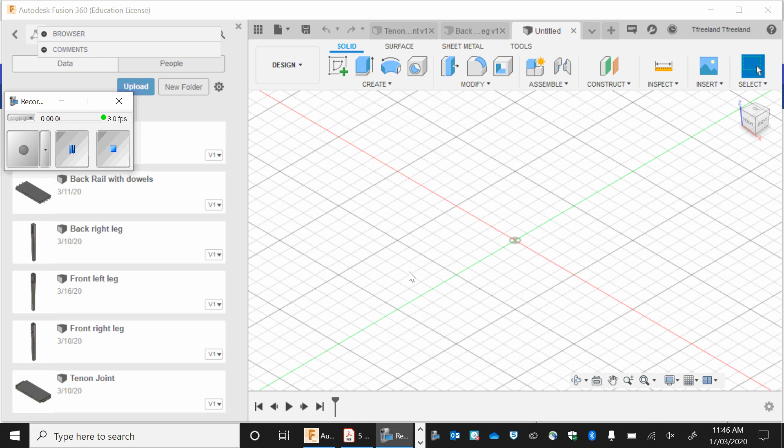The first thing we need to do, we've created a new design, but you need to save this design to be able to put any components in there. So I'm going to save this design in my folder under industrial technology, bedside table, and just save this as completed bedside table.

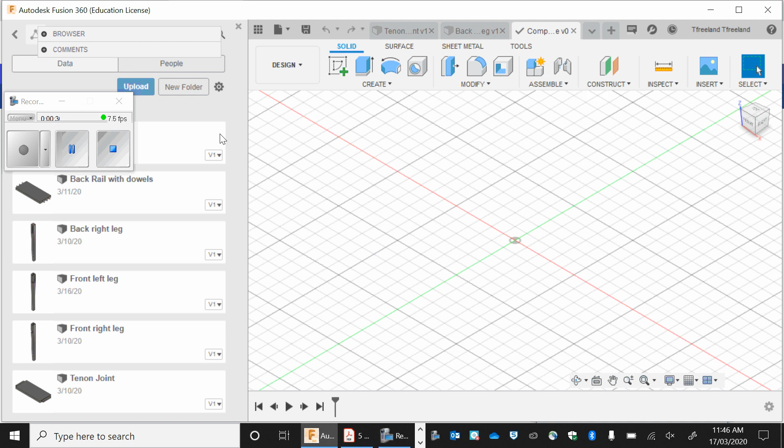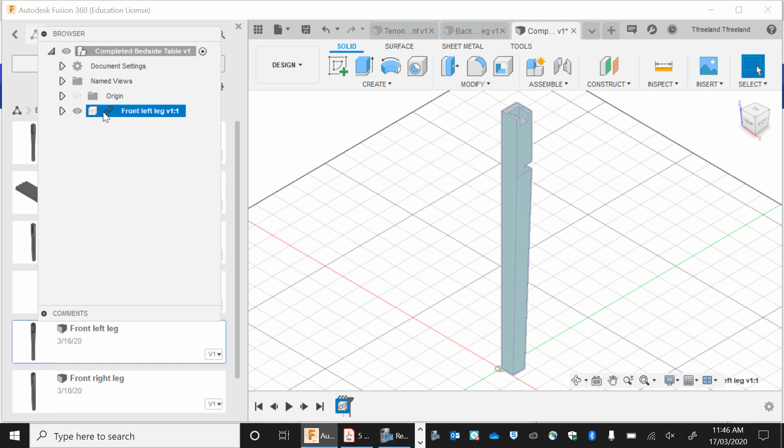I've saved it. What I'm going to do next is go first with my front left leg and see how I can insert it into my design. I'm going to insert that in, and there's my job. I'm just going to rotate it around 90 degrees and press enter. Next, that's my leg there, and I'm going to ground that, so basically with the little pin, that's going to ground my job so it won't move.

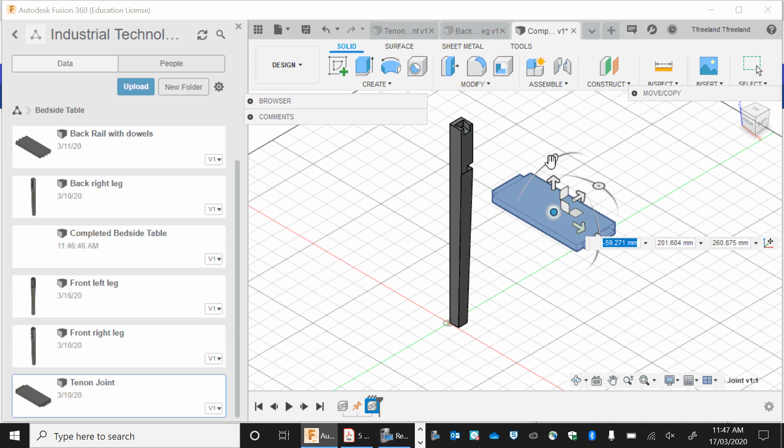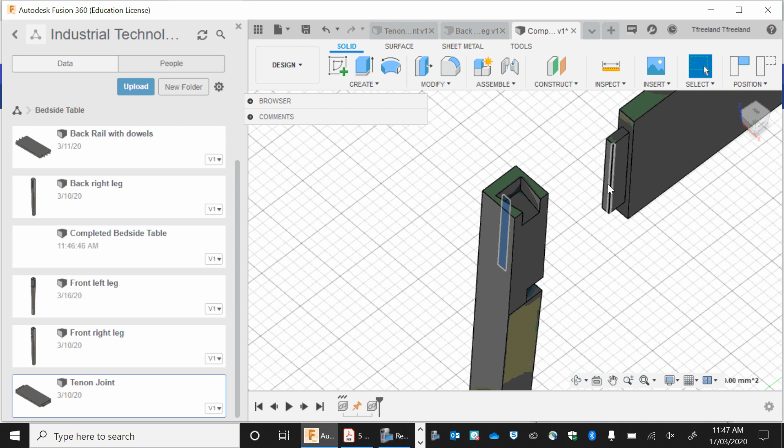What I do next is bring in my tenon joint, insert into design, rotate it, enter. Now I'm going to need to use my orbit tool so I can get around, get into the tenon, and rotate in. I'm going to select the back of that joint, and then select the top of my tenon, holding shift so I can hold them both at the same time. So that's blue and that's blue. Now we're going to be using the joint tool, press joint, we capture, so continue. This is a type of joint, we just have it on rigid because we know it's just going to sit in there stationary, and we go enter, and our job has sat in there like so.

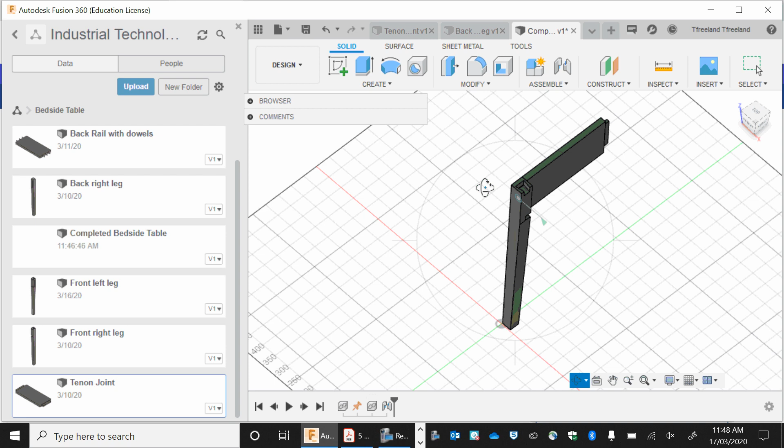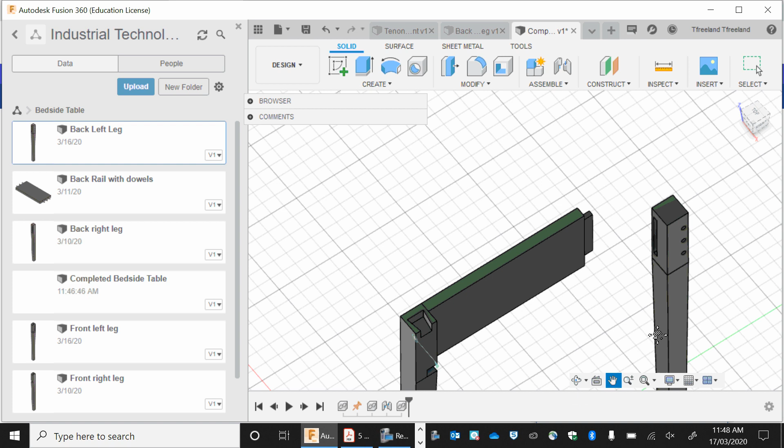What we do next is we've got our front left leg there. Now we get our back left leg, insert into drawing, and repeat the same step. Enter it into drawing, we go enter. I'm going to rotate it around until I can see the tenon or the mortise, so I can see the back of my mortise. I want to select that area, orbit, and hold shift, so I've got both blue. We join - well, that's on revolute as well, so rigid, and there we go.

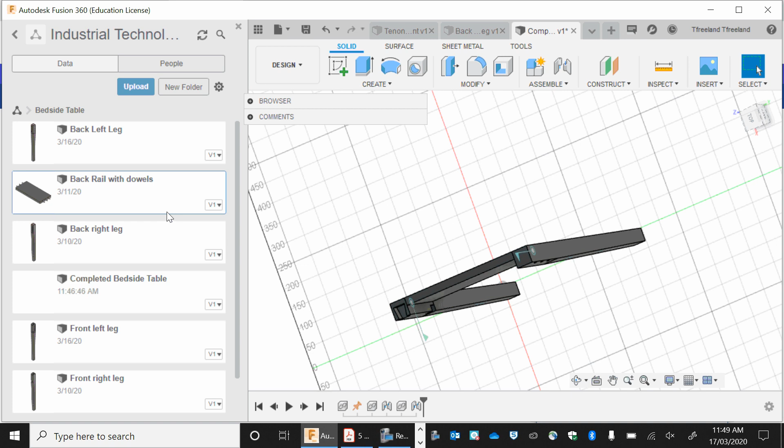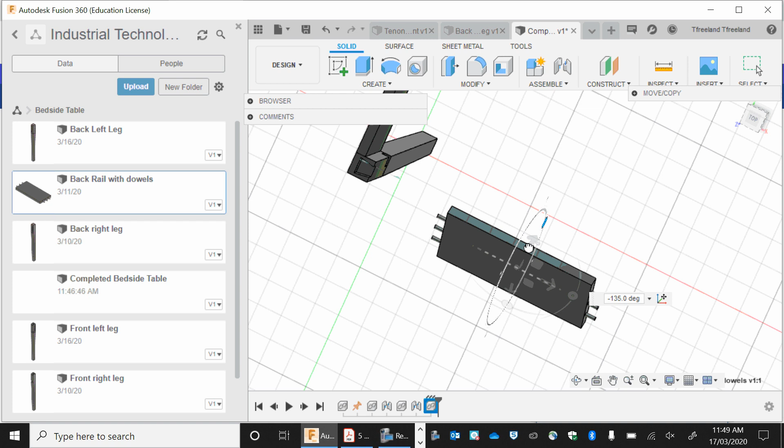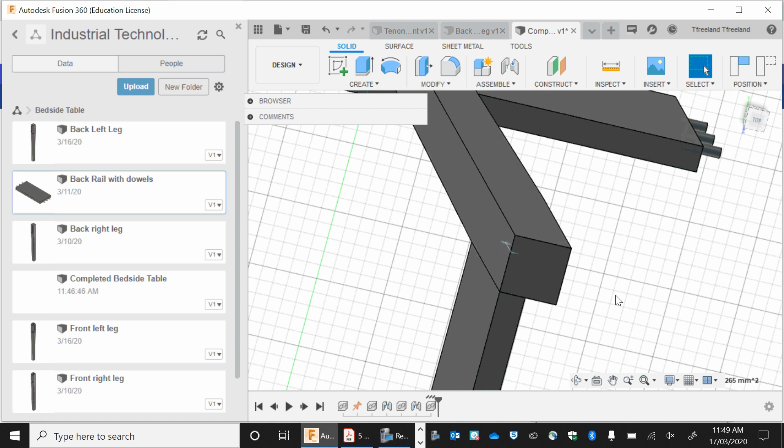What we do next is I'm going to insert my back rail with dowels. I'm going to line it up, rotate it. Can't really see it too properly, so I'll get my orbit tool, and move it over to my joint to make it a little bit easier. What I need to do here is select one of the dowel tips, so I'll hold shift and select that. Because I've selected the top one, I need to go to the top hole on here. Can be a little bit tricky.

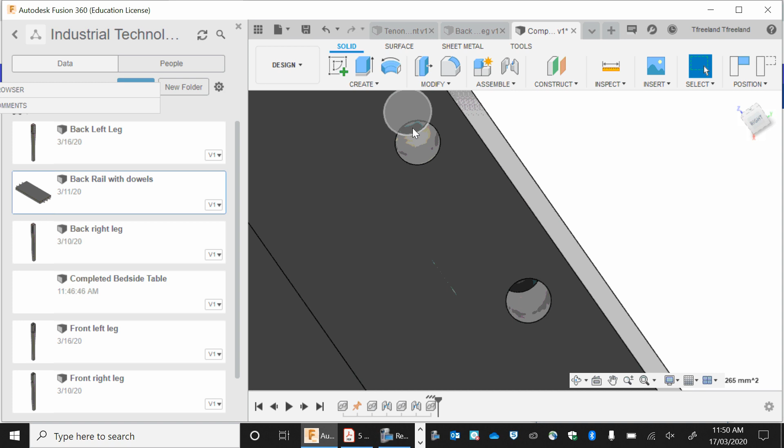Now I can see the back, so the back's there. Hold shift, and then I'm going to go join, we'll capture that. Still on revolute for some reason - rigid. And there we go. So that feature right there, how I'm changing from revolute to rigid, basically that's just how it animates the joint, so it's really nothing to worry about.

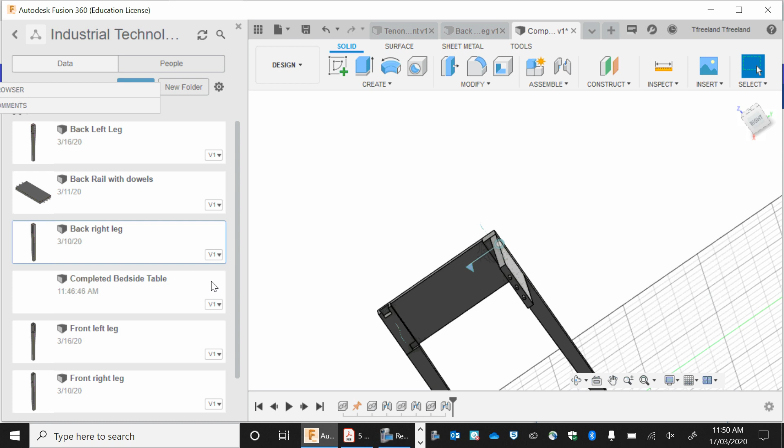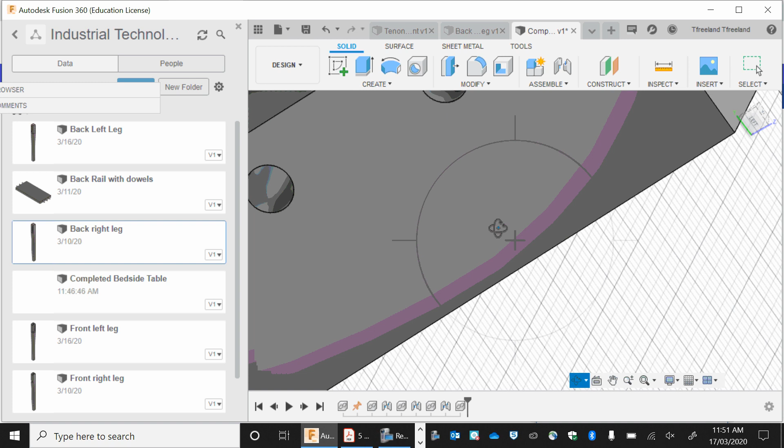I've done both of my left legs. Now I want to do my back right leg, so I'm going to insert that into my drawing. So we've got it there, I'll enter. Remember, I need to select my dowel hole - always try and select the back to make it a little bit easier on yourself, so it can be quite hard to find. So there's the back of the hole there. I'm going to zoom out, orbit. Before we touch the next one, remember we're going to hold shift down. We go assemble, and we go enter. Now we've got 3 out of the 4 legs.

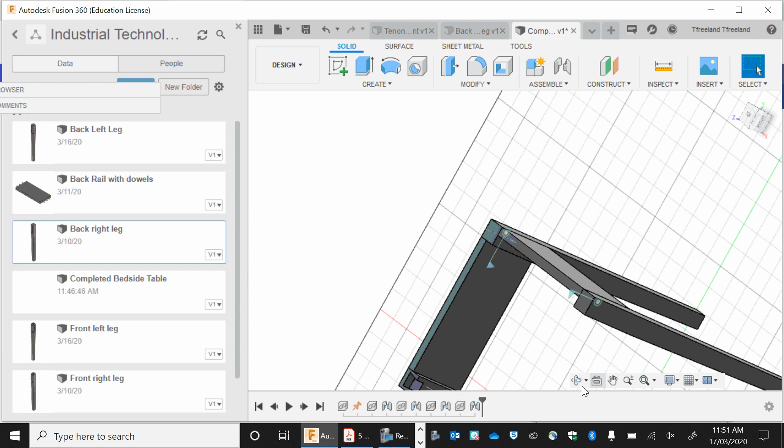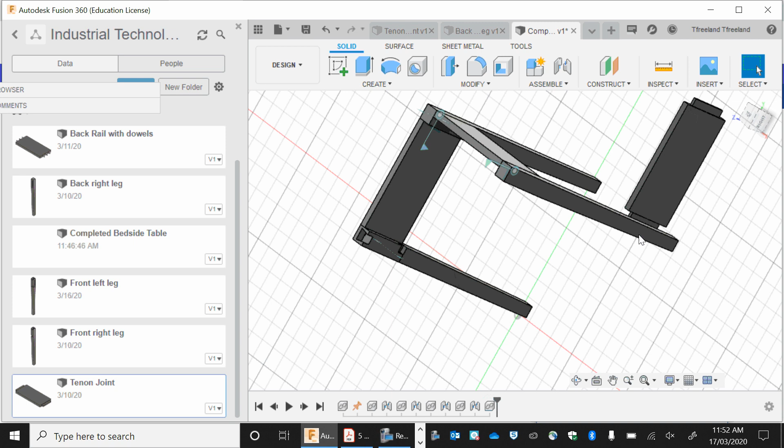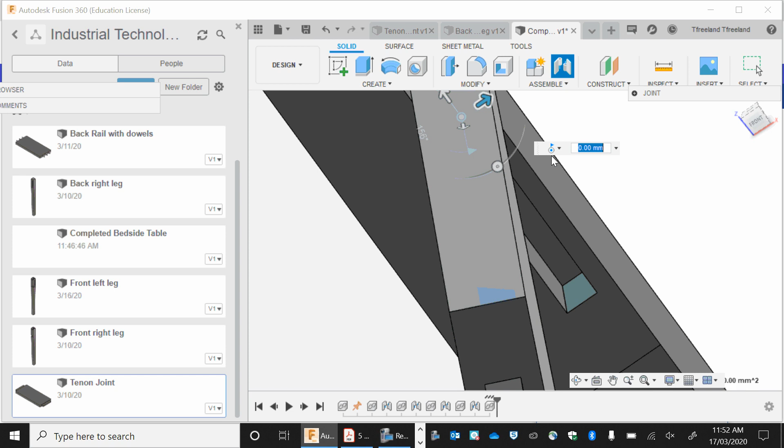What we're going to do next is insert another tenon joint here, so insert into current design. I'm going to rotate that around, it's easy to work with. Enter, and we're going to move it. What we want to do, remember like we did before, is select the face of our tenon, and select the back of our mortise for it to go into. Remember holding shift before we select our next surface, and go capture. There we go, assemble. Now we do our last one, our front right leg.

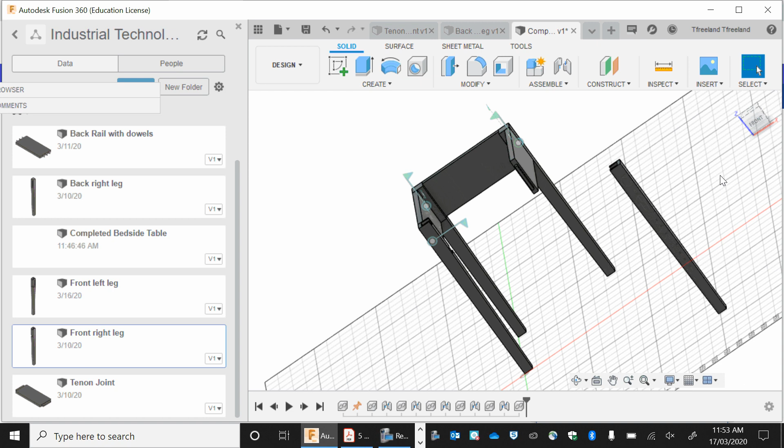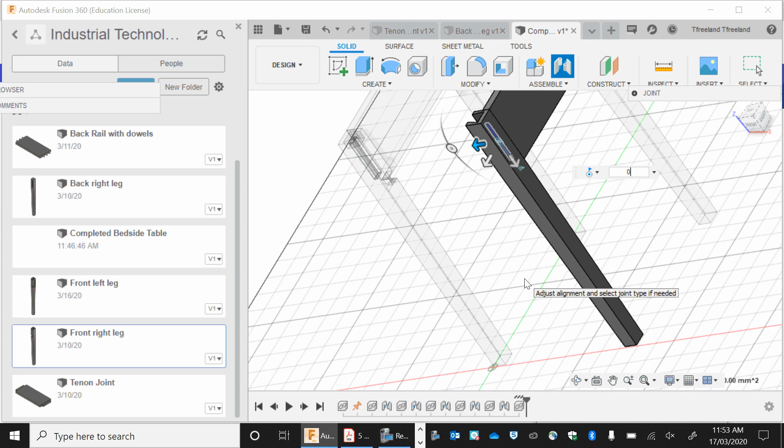We'll insert that into our drawing. We've got that there. We're going to have to spin this one around so that you can see, you can put the tenon joint in the right spot. As you can see, both of our holes need to line up with each other - the back of our job, back of our mortise, front of our tenon, holding shift when we select both of them. And we go enter. Right, we've got our whole carcass together just like that.

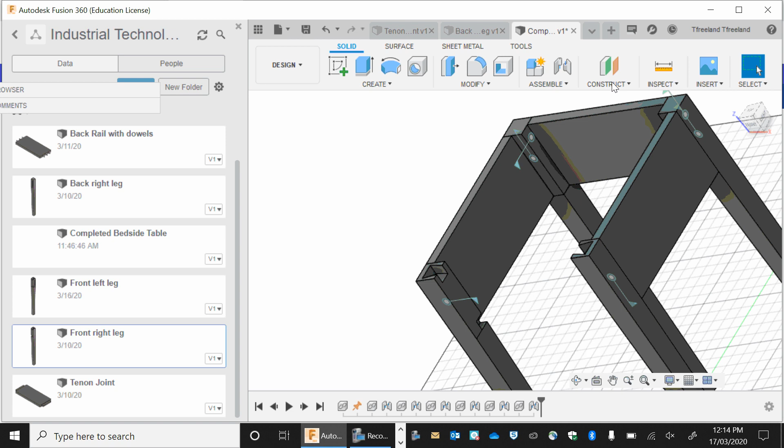Alright, so what we're going to do now is the top rail measurements. The way we mark that out, I'm going to go inspect, go from this joint to this joint, and that's 370. So I'm going to have to do a piece 370 mils long, and then I'll see how wide it looks - so 42. I'm going to open a new design now, create sketch, choose the bottom plane, 2-point rectangle, so it's going to be 42 wide, 370 long.

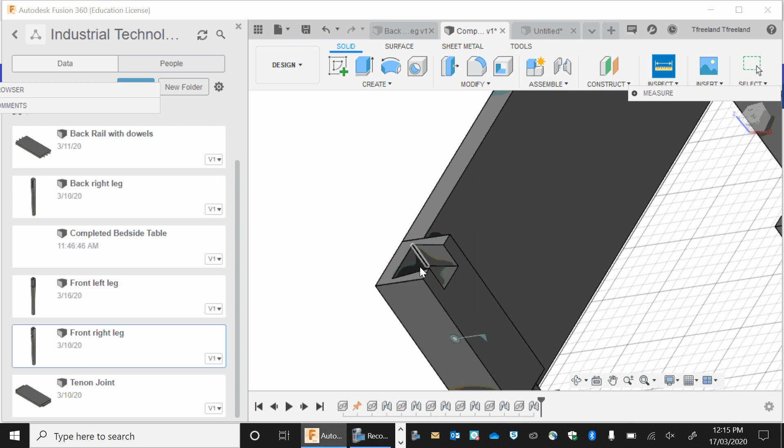Okay, it's 19 mils thick, enter. I'm going to go back to my job and have a look how long this dovetail joint is. That's 30 millimeters. So it's 42 wide and it's 30 deep.

Now I'm going to choose my construction lines. I'm going to do one at 5 mils, just like I did in my last ones. One at 10 mils. One at 5 mils. One at 10 mils.

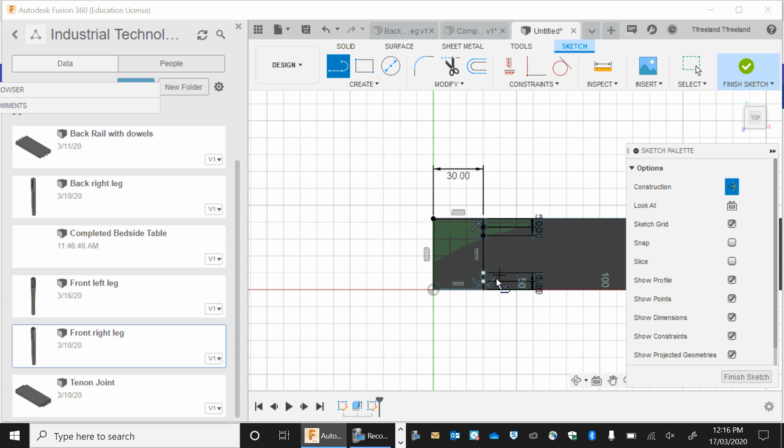Now I'm going to choose my line tool again. Do this line all the way out the top, and this line all the way out the top. I'm going to turn my construction lines off, and from this line here, I'm going to pull that down. Do the same on the other side. Go finish sketch.

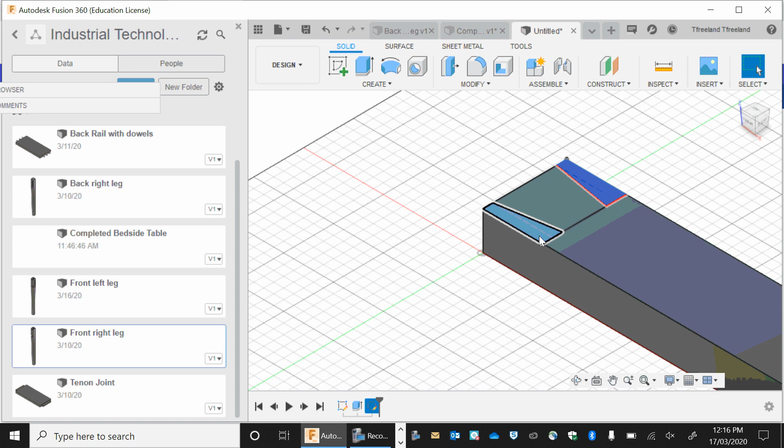So I should have a finished edge on this side, and then a finished square on this side. I'm going to hold shift so I get both of them. I'm going to extrude these down by 19 mils, to create my half lap dovetail. And do the same to the other edge.

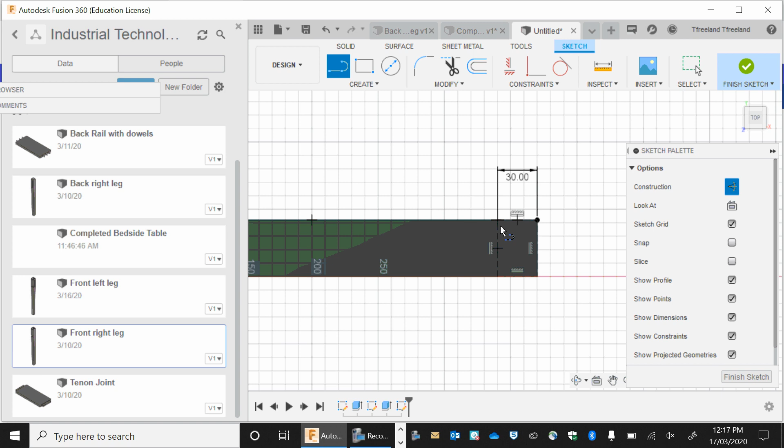So create a sketch again. Use my rectangle, turn my construction lines on, just to make my dovetail. So it's 42 by 30. Enter. My line tool, making sure the construction lines are still on. So one at 5, and one at 10.

Do the same to the other side. 5 mils, 10 mils. Just remember, I'm going to extend my line to the edge, just so it's easier to mark out. So my 5 mil line I'll extend to the edge.

Turn those construction lines off now. Pull it down. Do the same to the other side. Remember, going to the line between the 5 and 10 mil lines, and I finish that sketch.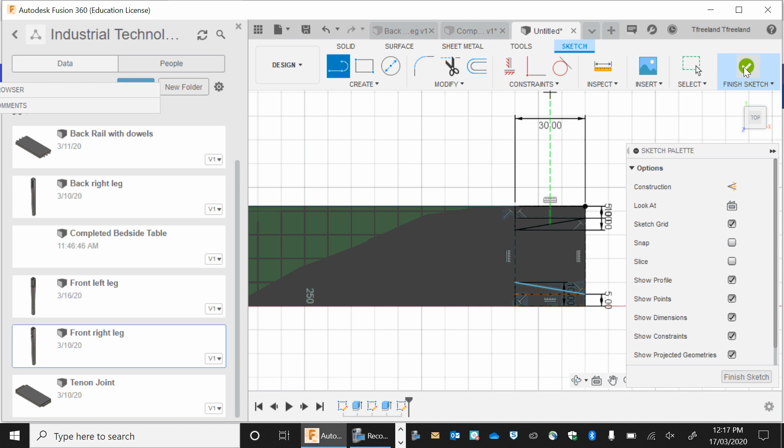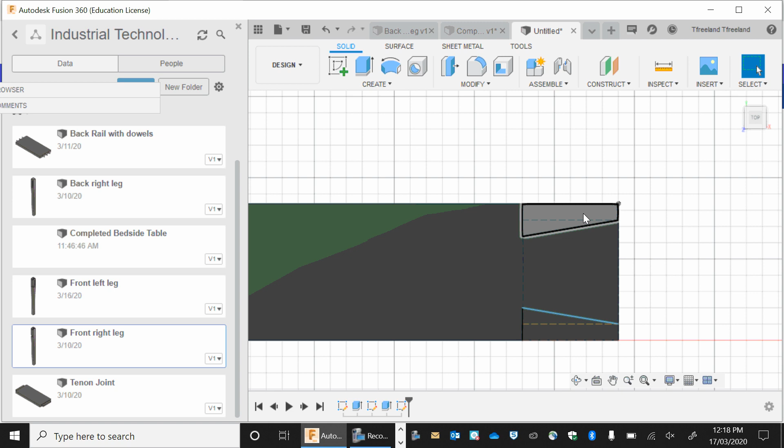As you can see, I can't select this area because it's not a solid line there. So I'm just going to go Control Z, and it takes me back into my sketching. I just need to finish off this shape, by pulling that down. If I go finish now, notice how I've got my sketch completed. Minus 19, extrude, and that gives me that.

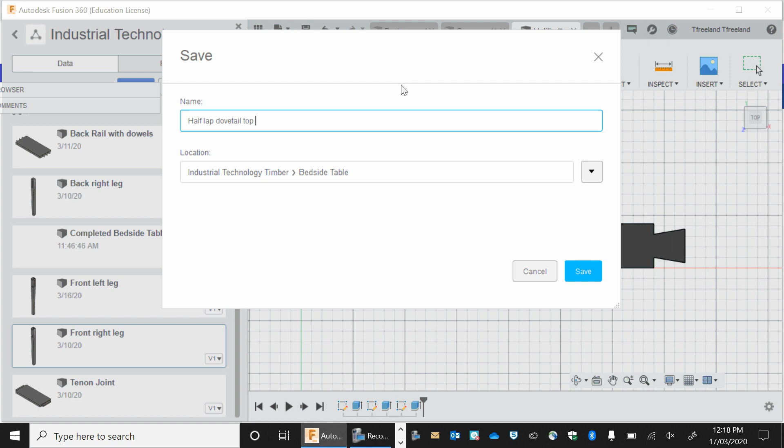What I'm going to do now is save this as half lap dovetail top piece. Make sure it's saved in the bedside table. So I'm going to save that there.

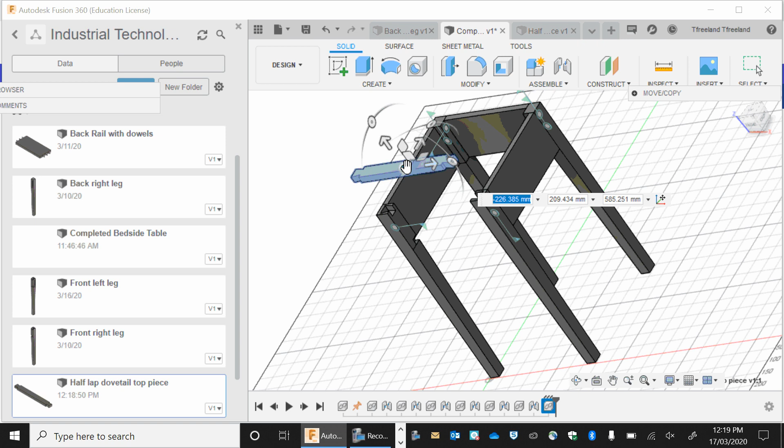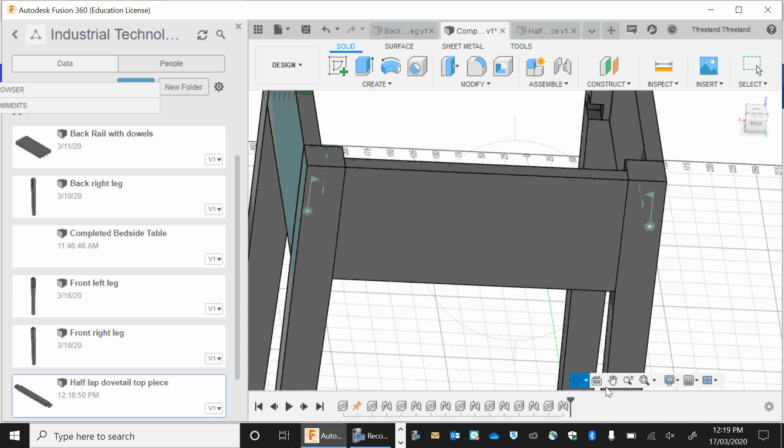Now I want to do my bottom rail as well. So to be able to see my bottom rail properly, I'm just going to orbit my job around. I want to be able to see from here to here, so I just want to measure that. So that's 340 mils long.

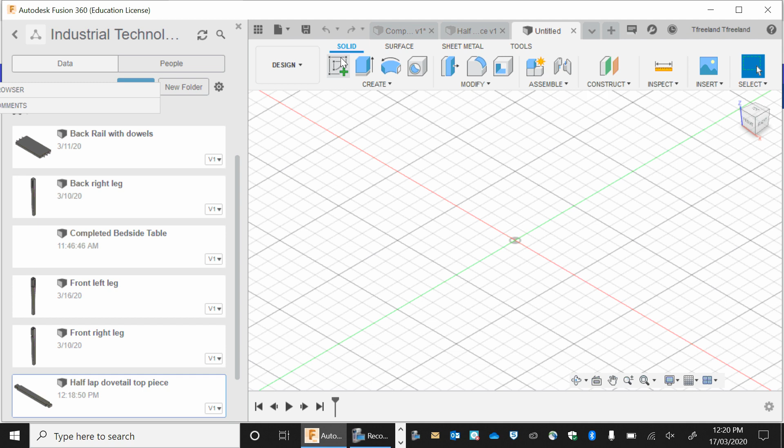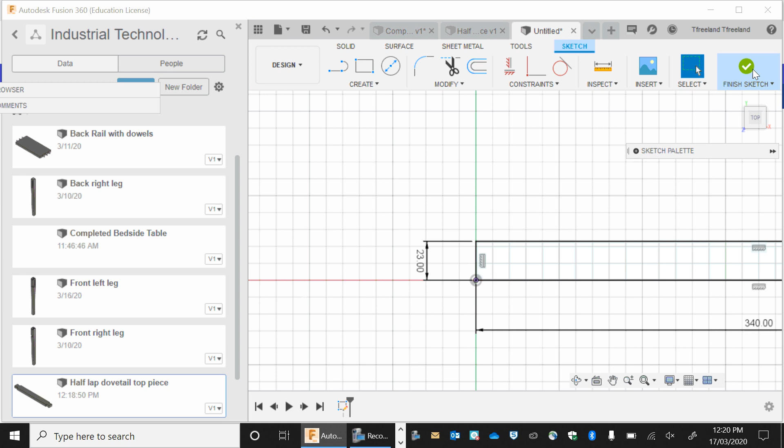So create a new drawing, 2-point rectangle. So this is going to be 340, just like in the drawing. 340, it's going to be 23 wide, 340, go enter. I'm going to finish my sketch, and extrude that up 19 mils.

Now this is going to be a stopped housing joint, so I'm just going to take a little edge out of this. And before I figure out how much the edge is, I need to see how deep my stopped housing joint is. So what I'm going to do is I'll choose my measure tool, and I'll measure those.

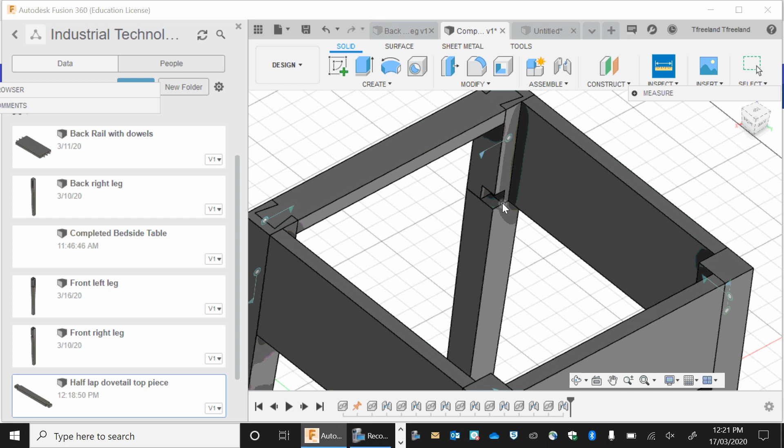So that's 15 mils. So what I do, I'll get a rectangle, turn on the construction lines, and that's 23 wide, but I want to go 15 mils in to match my joint. Remember how we took 3 mils off? We added 3 mils. Now I'm going to take 3 mils off this edge.

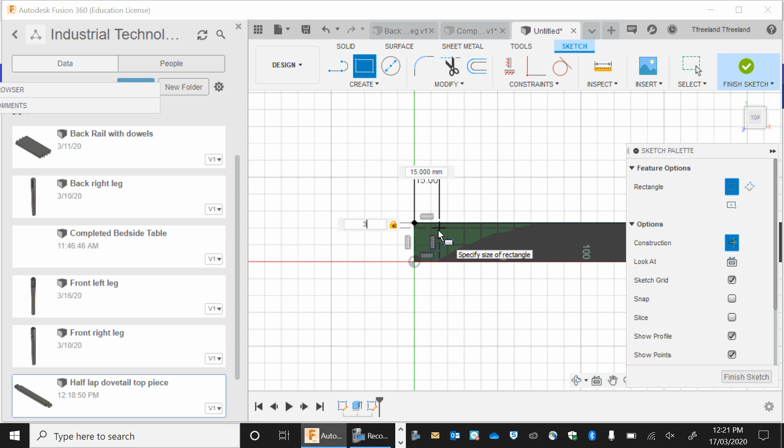Making sure the construction lines are turned off, finish that sketch there. I'm going to extrude this minus 19. I'm going to take that joint off, that material off. Do the same to the other side.

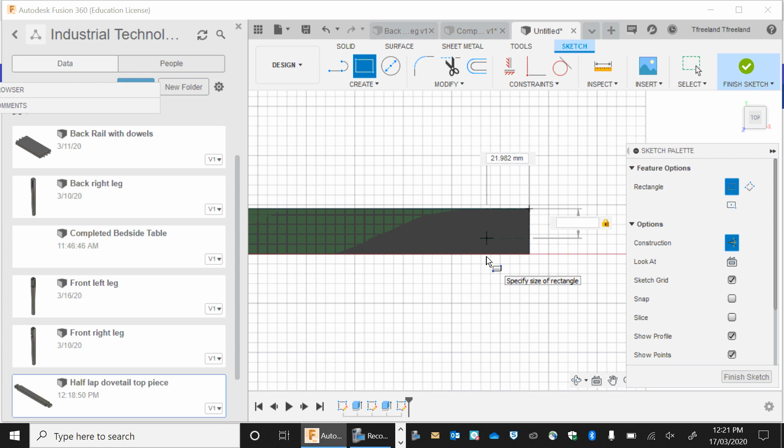So create sketch, 2-point rectangle. Remember, it's a bit easier if you do one with construction lines beforehand. 23 by 15. I've turned the solid lines back on, so I turn the construction lines off. I'm going to extrude this out, minus 19, enter.

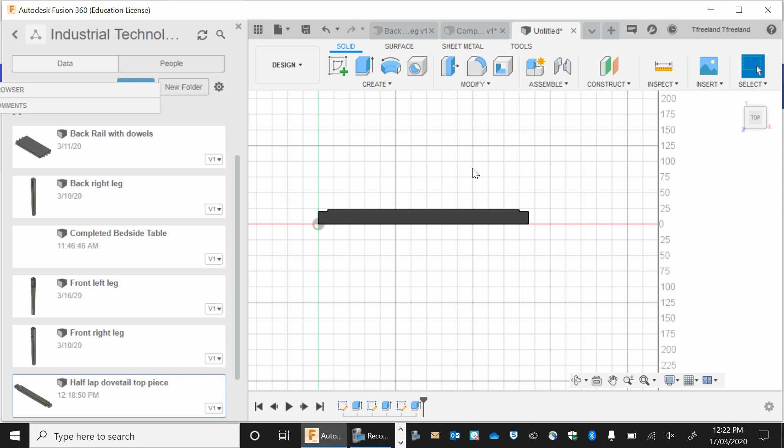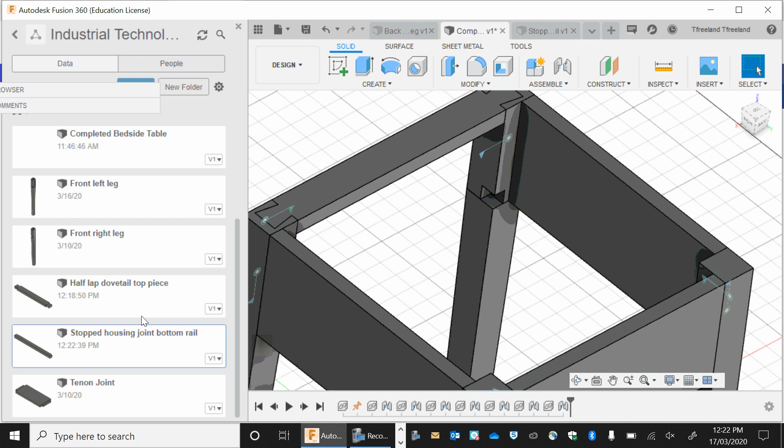Okay, and then I'm going to save this as stopped housing joint bottom rail. Save. I'll go back to my job, and once this is finished saving, I'm going to insert into current design. So I've inserted it in there.

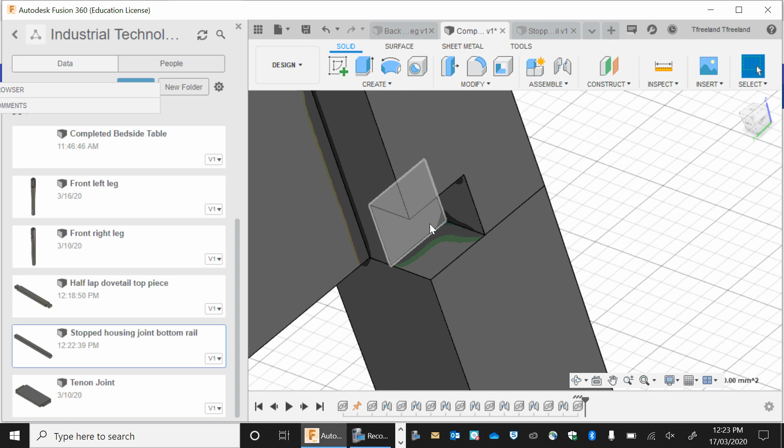I'm going to rotate it so the bits that I cut out are facing outwards from my job to make it a bit easier. If I select this surface, I'm going to orbit around. Just press escape so we get off orbit. Hold shift and select this surface, and we go join. Turn grid back on. And we go enter. And if I turn this around, we have a look, and that fits perfect.